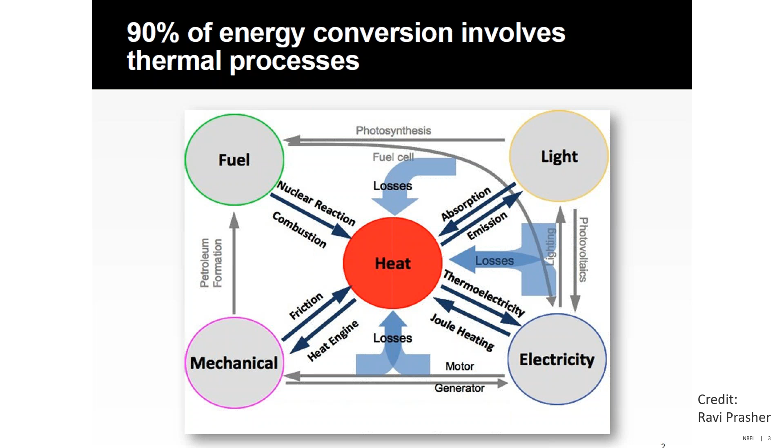So the notion here is anytime you're dealing with energy, heat's involved in a big way. Doesn't really matter what you're doing, we all kind of know this. You can't really transform it, you can't really move it, you can't really use it unless you end up with a lot of heat. So no matter what you're dealing with, heat is involved in a really big way.

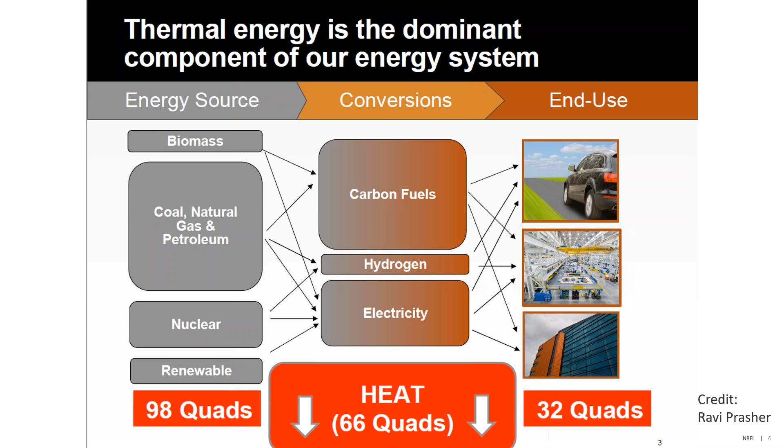This is kind of a high level slide, but if you look at it from the source in U.S. energy use, maybe it's around 100 quads. Due to thermodynamic limits, Carnot and things like that, you end up rejecting maybe about two-thirds of that, and you only use give or take one-third. So no one's claiming there's 66 quads that HEATER is going to utilize completely, but that's a really, really big target, so maybe it's worth thinking about differently rather than just rejecting it the way it always has been.

So a little bit of detail on the breakdown: maybe roughly about 25 quads from power generation, another roughly 25-ish quads from transportation, 5 in industry, and then they have about 7 in buildings.

I actually think this is really a little bit misleading because most of this power generation goes to generate electricity, which is then used in buildings, right? So this buildings number is kind of deceptively small. And really, even without that consideration, one of the things we're going to talk about is reducing loads. So I think it's actually a lot bigger than 7. Point being, really, really big numbers, thinking really big here.

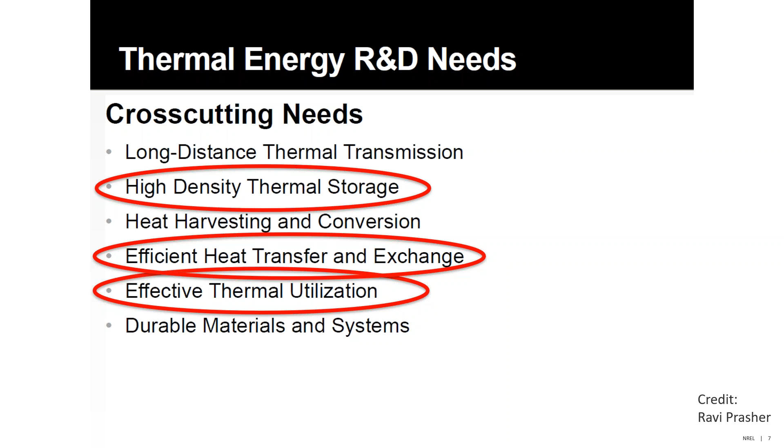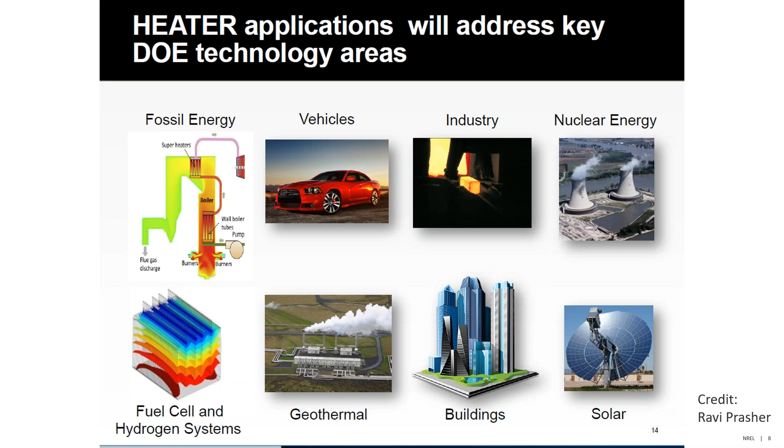The challenge: how do you manipulate thermal energy across all these complex systems to do something that actually matters to people? This is a bigger project. Some of the R&D needs identified at this Big Ideas Summit include transmission, storage, heat exchange. Our subset of the project probably deals with just a few of these, maybe half. It's not necessarily trying to cover everything you might care about in thermal energy, but in some way or another you might touch on a lot of these. You can see all the different players and areas that might be involved. It's a huge part of the U.S. economy.

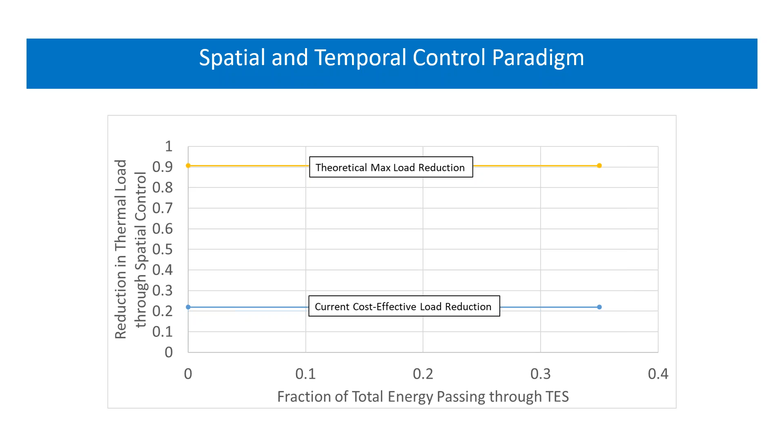If you're familiar with PF, you can almost think of this y-axis as cost-effective solutions for retrofits, so it's kind of minimal on your PF curve. Roughly speaking, a little over maybe 20% of the current thermal load could cost-effectively be reduced today. That just gives a baseline, so you get some idea of where things could go.

Now, if you think of the horizontal axis here - what's the x-axis? The x-axis is the temporal load, which is really a little bit euphemistic for thermal energy storage. This is normalized here, so if you were to take energy that could be stored thermally in buildings and then normalize that by the total amount of energy used, that gives you some fraction.

It turns out that's reasonable, but that was just kind of coincidental. If you were to look at currently in the U.S., about 2.5% of the energy used is cycled through energy storage currently, not thermal, just energy - that's pump hydro, right? So again, this gives you a ballpark. You were out here at 1, meaning all of the energy would somehow be cycled through storage. Where we currently are is kind of down here around 2.5%, approximately. The notion being, you can get some idea of where buildings exist today.

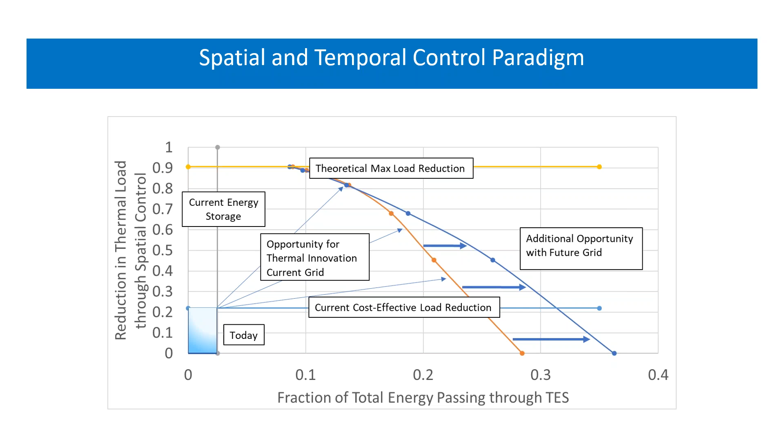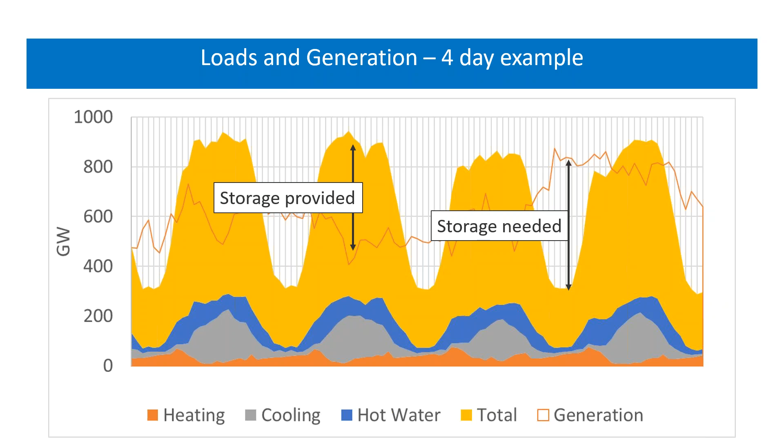So just to clarify, if you have additional load, you need to get energy from storage. But then there are other times when you might have additional generation, and if you could curtail you could, or you can put it back into storage depending on what you might need.

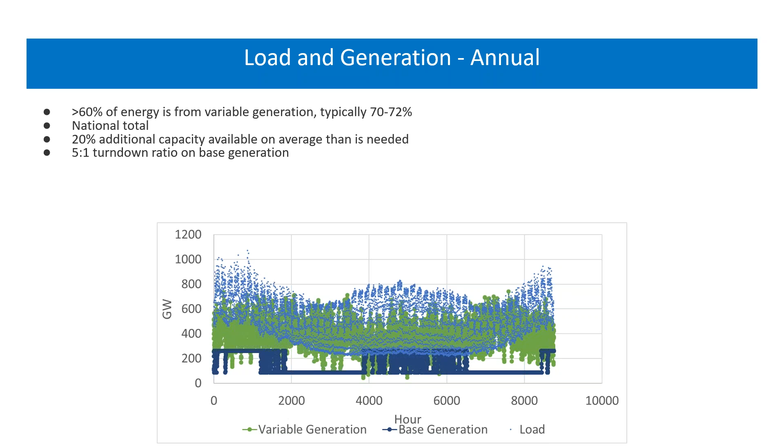I don't think anyone in this room will have too many problems understanding this. The big takeaway is sometimes your loads are really high, so no matter what you do, you're just not going to meet them—you need something else. You could either have a whole bunch of extra generation, which is expensive, or you can try and store it. Other times you have the reverse, and you can either curtail or try and store it.

Dave, this gets a little bit to what's your criteria for needed. So this plot is a potential generation minus site use graph. I know it looks terrible. That's not what I thought you meant by that. You're right, potential—potential, that's good.

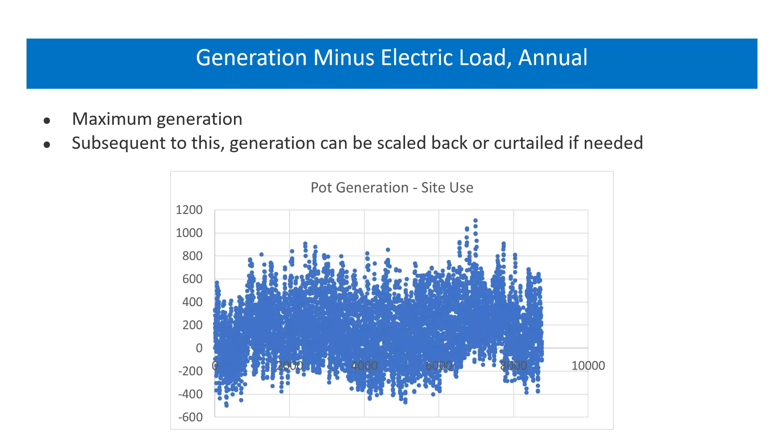Yeah, that would actually look exponential. So this is gigawatt hours, and my criteria is at every hour of the year, this needs to zero out. So if you're down here, you need to come from somewhere. If you're up above, you need to curtail or store.

So this is maybe a little bit boring, but basically the generation has some base load and some variable, specified as a mix between wind and solar, roughly 80-20, then you specify the percentage. For thermal storage, again going back to trying not to pick winners and losers, I didn't try to specify things like whether it needs to be distributed, integrated with HVAC, or some kind of PCM. All of that's sort of irrelevant. Model it as essentially having a mass, power density, and energy density, which gives you a capacity and power in small plants. What kind of leakage rates do you have, and what kind of charge efficiency do you have?

So these are the characteristics that would impact performance, and the notion would be, if you can get a handle on what things need to perform like, then you can give a kind of goalpost or benchmark to people doing research. Here's the kind of things you should shoot for. If you think you can reach them, then they can have impact. If you think these are completely unattainable, maybe you should not even try.

And then there's this elastic other energy storage. So I do everything I can on that one plot, the potential generation plot, to make it zero, using thermal. And if you can't—there are times you can't—then we have this magical backstop of other energy storage, which can provide whatever power and energy is needed, and I just keep track of that. That remainder is essentially, maybe that's pumped hydro, maybe that's batteries, some other technology that we're not dealing with, that you need something for.

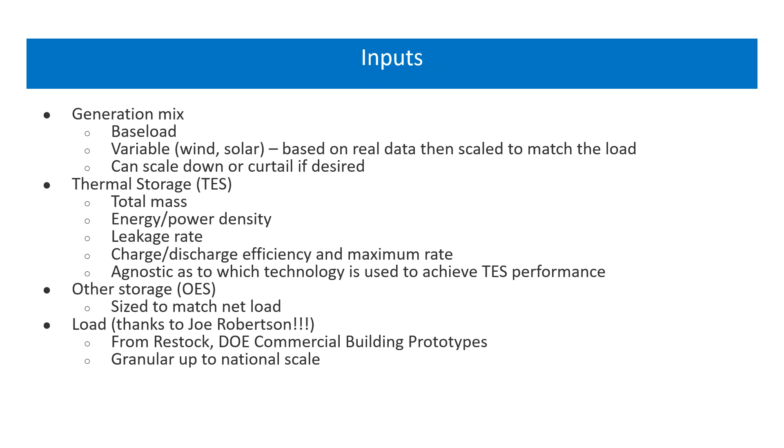So the grid. This is simplistic, probably for a lot of people, but the current grid—if you look at some of these charts, if you're familiar with building loads, you might have some rules of thumb in mind. But something to keep in mind here is that I switched all heating to electric. So everything came out of ResStock, DOE commercial prototypes that would have been gas, converted to electric with the COP. So loads are a little bit different than they actually are today. That's one thing to note, even for the current grid. Peak to average capacity is about 2, which is pretty realistic for some today, and around 8% comes from wind and solar.

My question is—so you assumed the COP is used to convert to electric? No, did I say that? No, I had a COP. Sorry, so you assumed the COP. Oh sorry, yeah, sorry.

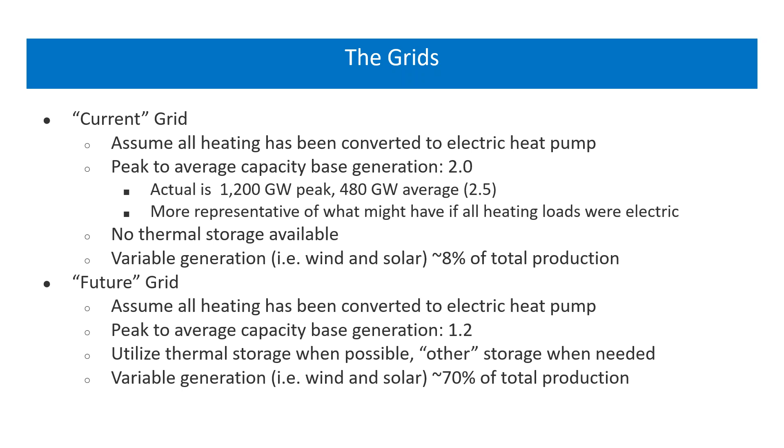Control logic—there's a lot of little stuff, but basically using thermal storage to the maximum extent possible. I didn't get into things like cost, because the thermal storage stuff doesn't even really exist, so that kind of doesn't make sense. But it was really about showing the most you could possibly do with thermal storage, that's the way I looked at it.

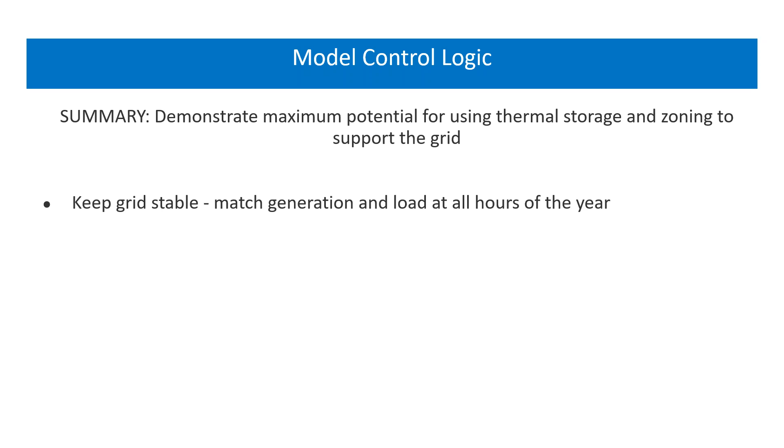Keeping the grid stable, so that has to equal zero on that one plot. Some of the control logic was to minimize this other energy storage. Again, all the results change completely if you have a different control logic, but the notion would be not only can you do the most possible with thermal, but that includes minimizing what other things you might need, such as other energy storage plants, batteries, all types of stuff. Basically trying to balance that over the course of the year so that you're not using extra energy to charge up your thermal storage system that might not be useful later—it has to end and start at the same spot.

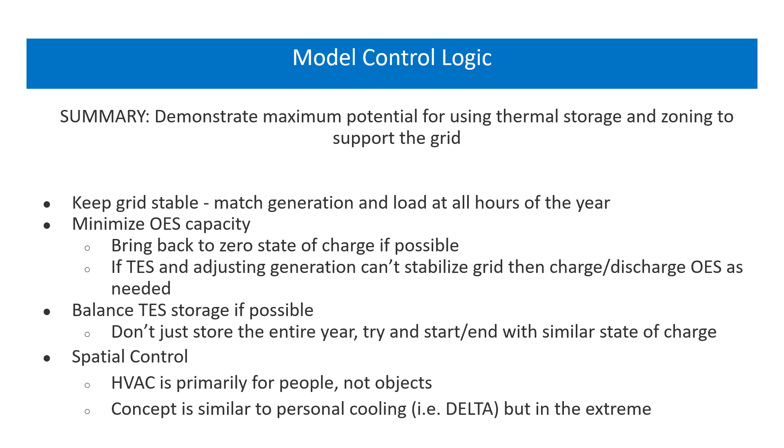And I guess I talked about the spatial control, about what that really means—that's kind of a big part. So if you look at this maximum spatial control, I kind of jumped ahead—this is that theoretical minimum HVAC, roughly speaking, about 5 to 10% of what's currently used.

So this plot, I guess I should explain it—this is quads of current heating energy and cooling energy, and then you have existing buildings and futuristic buildings. This is one of the things initially looked at. So if you look at this plot, right now it's like 7.6 quads of heating energy for these existing buildings, and if you look at this theoretical minimum, you might be down around half a quad.

One of the things people might say, and I question as well, is how much does that change if you actually have a really good building? Should we really be thinking about making better buildings rather than this kind of ultra zoning of people? That would be shown if you look at these two bar charts. If you look at existing buildings, you're around half a quad. If you looked at futuristic buildings—things like R60 walls, SEER 20 heat pumps—they're not crazy ridiculous, but it's pretty advanced.

And the picture that you get is not any different—the theoretical minimum is way, way lower than it is right now. If you have existing buildings, the theoretical minimum might be 5 or 10% of what's currently used. And if you have the best possible building that could exist, it might be 2% or 3%. The point is it's still the same—there's a lot of opportunity there. I'm not saying that we should go there, this is just highlighting the boundary of what might be possible.

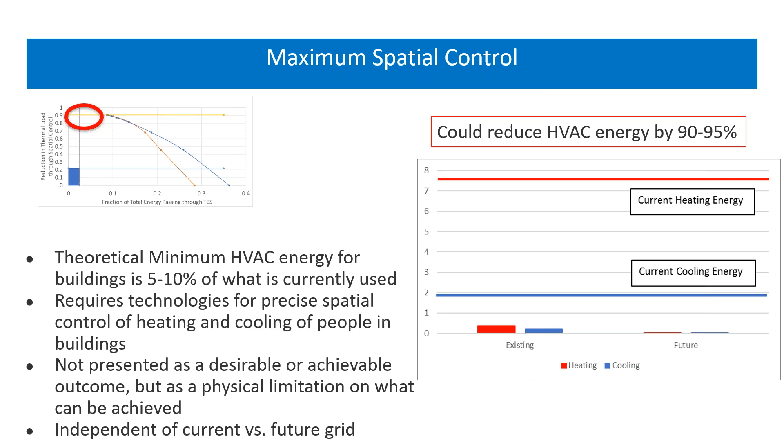Now if you were to look at the maximum temporal control—this is when I say we have infinitely performing thermal storage—this is 72% variable generation, but you have like 190,000 gigawatt hours of thermal storage, and basically the one key rating, you can charge and discharge that every hour. Not limited at all by the performance of thermal storage, you're limited by your loads and the needs for everybody else.

In that case, the metric I use here would be the amount of other energy storage that's needed. Let me explain: this red circle would be existing buildings, so existing loads—I didn't deal with any changes there. But now you have a futuristic grid with 70% variable generation, which in general means you're going to need enormous amounts of energy storage somehow, way more than anybody would think of. If you did that, I remember these numbers end up being really large, partly because all of your heating loads are now electrified.

So that does, if you have existing buildings, it does increase your load quite a bit. But if you were to say I had no thermal storage, so I have this really advanced grid with huge amounts of variable generation, I need a certain amount of energy storage, which is a really, really large number.

The reason that's important is because this other energy storage is kind of euphemistic for things like batteries, or maybe pump hydro or compressed air or something like that. But these are expensive technologies. They exist, people throw them around a lot, people talk about them. They're really, really super useful, and there's a lot of money going into development, right?

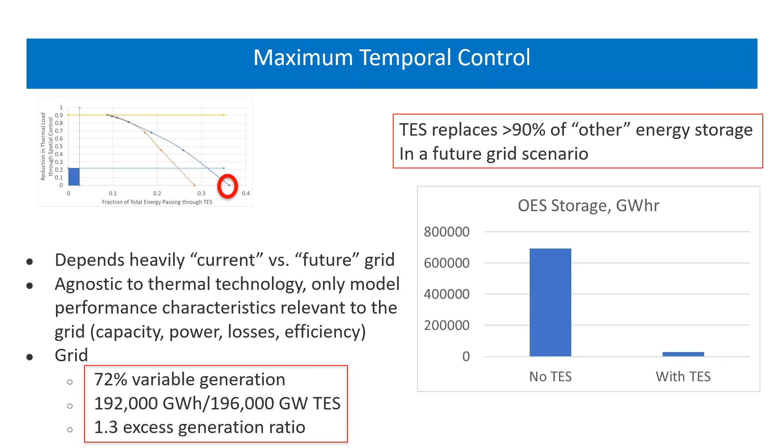So that's a big enough number that you might say, well, okay, again I didn't deal with cost, but if you can reduce the capital expenditure you need for this by 90%, this stuff can be pretty cheap, which it might be. There's a lot of opportunity, right? We're not at that point, I'm just trying to highlight that there's a potential, so it's worth looking into further.

So here's an example, another situation that I looked at. I took two different points here: one is kind of this intersection, what I consider the best today building, and the other one is just the point up here on a futuristic grid.

So you might be able to, with 70% generation, reduce your other energy storage by about 90%, reduce your base generation — this is kind of a euphemism for fossil fuel generation, it doesn't have to be, it can include nuclear and stuff — but basically reduce that by 60%.

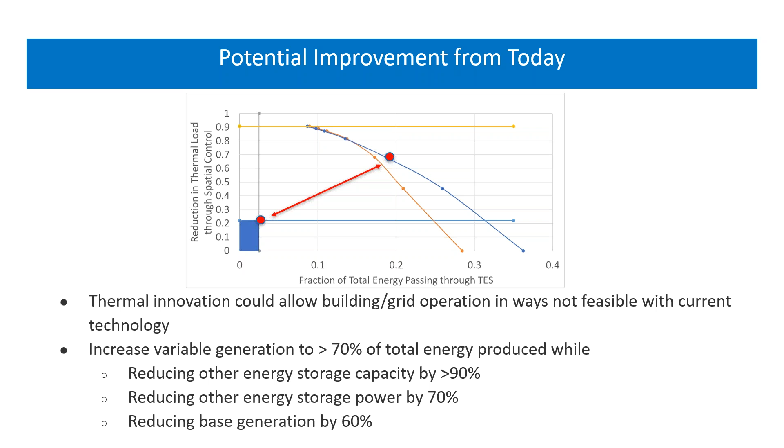These two here: one is energy storage capacity for other energy storage, 90%, and the power required from other energy storage, 70%. So the point being, thermal can do a lot, not just in existing buildings, even in advanced buildings. There's a lot of potential there.

Now, those are all not limited by the performance of your thermal storage system. When we try to get the idea of how you back off from that, and what sort of parameters or metrics for performance you might actually want to highlight or have people shoot for, we did a little bit of sensitivity analysis.

So if you guys think about batteries, with this particular thermal energy storage performance, it would take 5 hours to charge or 5 hours to discharge. I think I picked that as kind of a rough number. It's not as good as a battery, but thermal processes are slow, so that might be a little more. But if you had a thermal storage system that might operate like that...

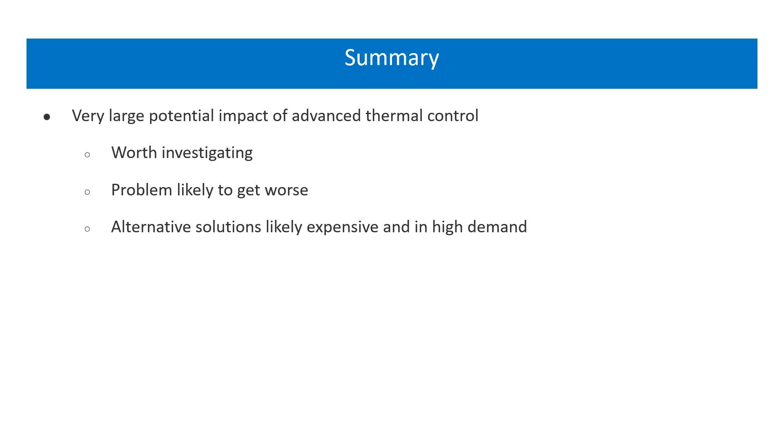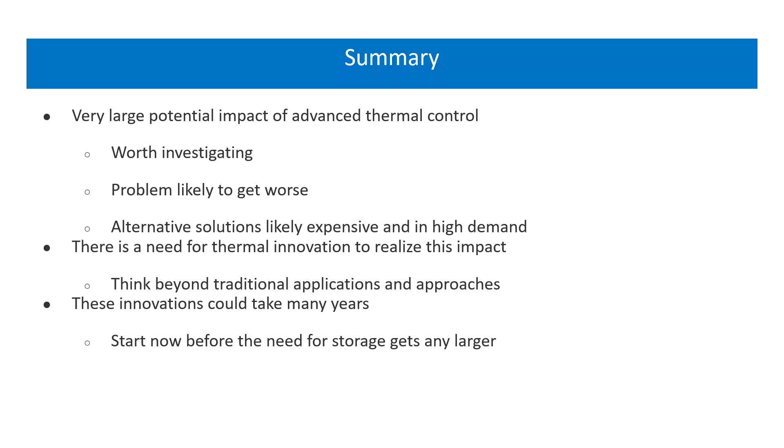The other thing is that this is well beyond traditional approaches - nothing at all incremental, trying to think big here. And it's going to take a long time. A lot of this is ground up technology development. It's a complete paradigm change, and it takes a long time. So if you're going to investigate, you try to start sooner rather than later, otherwise you're going to be behind the ball, and you're going to have suboptimal solutions that cost tons of money and take a lot less... more resources.

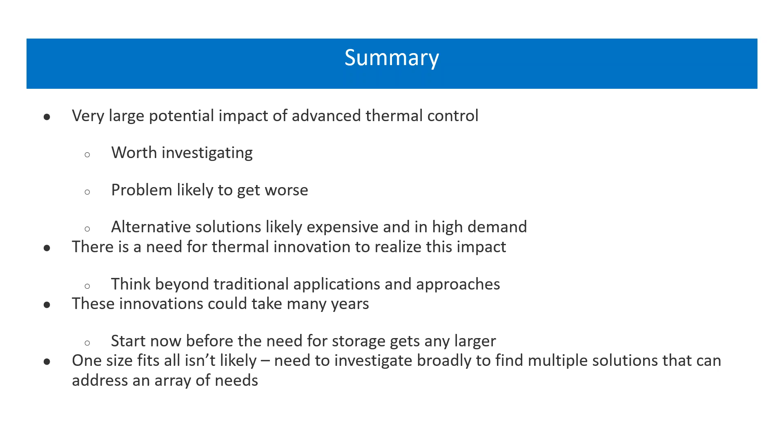And it's likely, this kind of is what it is - likely, even though I model a single sort of performance characteristic, that it's going to take multiple solutions. If you were even going to try and use any of these approaches, it's probably not a single one-size-fits-all.

I cannot avoid thinking about the reject heat of thermal electric power plants. Given that 70% renewables increase from 30%, you have the rest as reject, kind of, right? So the efficiency of the thermal electric power plant is about 30% or so - 70% is being rejected, right?

There's a lot of heat there, right? It's high quality relative to buildings. Well, for buildings, this is my point - for power generation, it's really low availability heat, right? So from a thermodynamic standpoint, it sucks. But for a building, it's precious, right? Because it's hot enough, temperature-wise, that you still can do quite a bit in buildings.

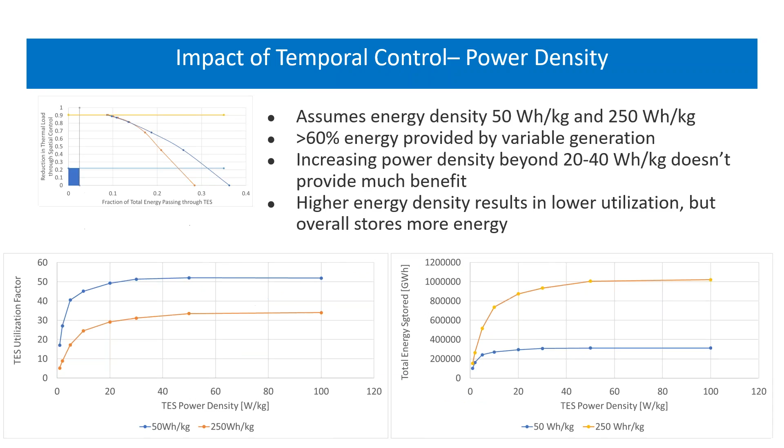Did you give any consideration for thermal storage for that heat reject as connected to this? No. So initially, this is focused on the building side of things. So that initial plot, there was power generation, transportation, industry, and building, and so we were tasked with building.

So there's no doubt, this is bigger than just this project. There's no doubt that people are looking at that or should look at that. I mean, in general, if that were easy, it would have already been solved. So that's also a big idea, way out there kind of thing. But that was beyond the purview of this particular project.

I think the point that I'd like to make is the fact that for power generation, that heat is useless, pretty much, right? But for buildings, that's the connection I'd like to make - that's actually pretty precious, or it could be. It's mislocated. Yes, that's a problem - it's mislocated heat, but it could actually help you quite a bit if we think creative. You already posed that we need to think creative enough. So what about thinking creative about the reject heat we have in power plants to use it?

Actually, I have a piece of paper on my desk where we were thinking about that at the very beginning. I have no idea. I don't want to say I solved that. I didn't solve it, I'm just saying I think it's a good idea. I don't know what to do about it beyond that. There's a thousand ideas if you go look at papers from the desk. Yeah, that's true.

Co-locate your buildings and your power generation. You don't want that, that's undesirable, right? Yeah, very undesirable. The fundamentals, I mean there's a lot happening. Really a bad thing, the pollution problem. Well, we can solve that, that's another solvable problem. To get rid of your power plant. Well, but you still have 30%. Yeah, sure, that's what I'm saying.